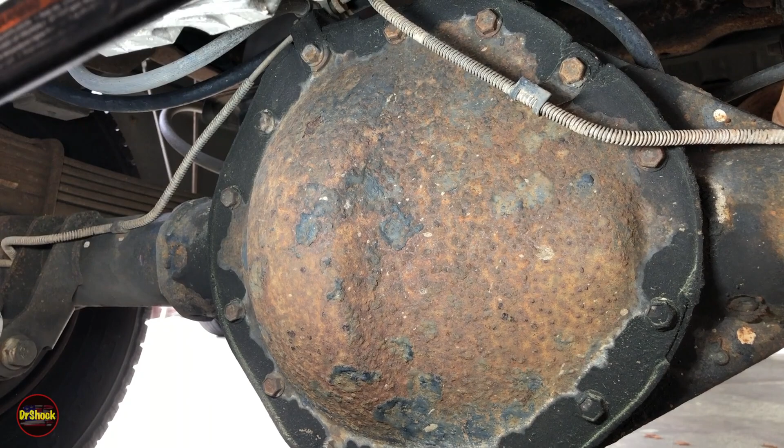Like you can see here, we've got 14 13-millimeter bolts that we're going to have to pull to get this off. One of the things we're going to look at also, since we have this kind of weepage along the top, and there's a little bit of weepage at the fill plug itself, we're going to check and make sure our vent pipe is okay, because if we got excess pressure in here, that can sometimes result in what we're seeing.

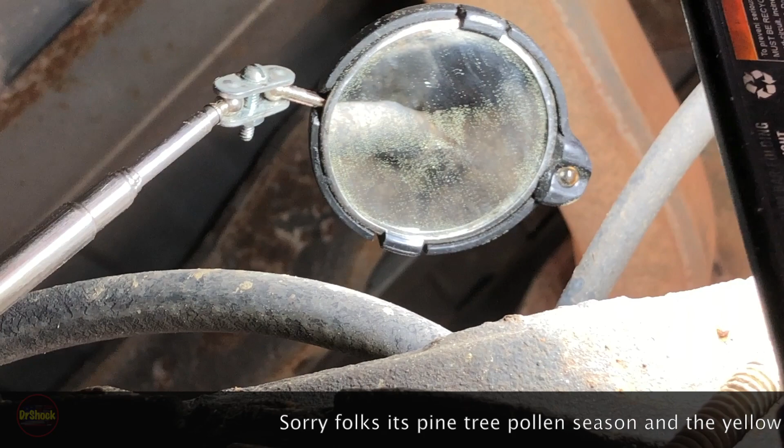So the top of the vent hose, hopefully this will allow you to see it with this little mirror, comes in and gets clamped to a connector on top of the axle. So we can see in this view here, that's it, right? And so now we know we have the hose, and now we can follow the hose.

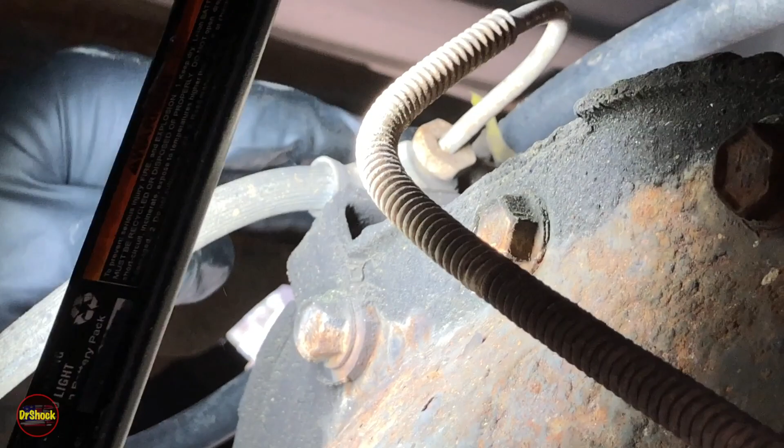It goes up here, there's a bracket along with the brake lines that holds it, and then it goes up around here. At least on this particular truck model, most of them should be similar. It goes up to this other bracket for the brake line, and then you can see at the very top of the hose there is a little one-way relief valve.

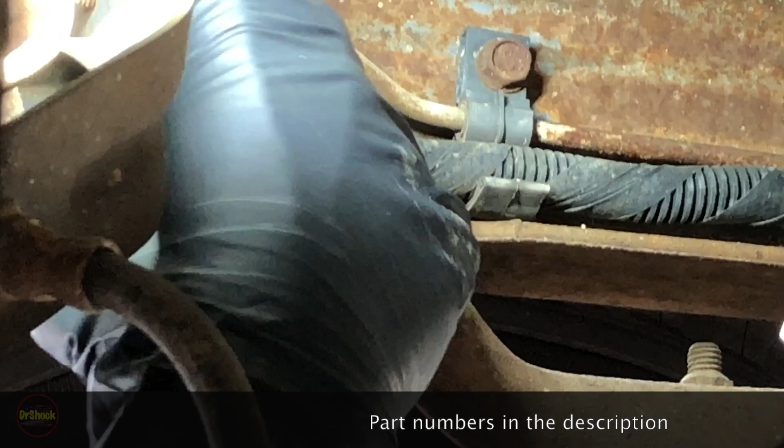So this will let air out, but not let water in when you're going off-road. You want to make sure the hose is there, it's clamped down, not broken or cracked, and not missing this little guy plugged into the top. That can also indicate a problem for what we're seeing. But since it looks okay, it's most likely the gasket, so we'll go ahead and get it off and determine if that's the case.

So I'm not necessarily going to have you sit here and watch me pull all of these 13s off. Let me go ahead and get those going, and we'll come back right before we're ready to break the seal.

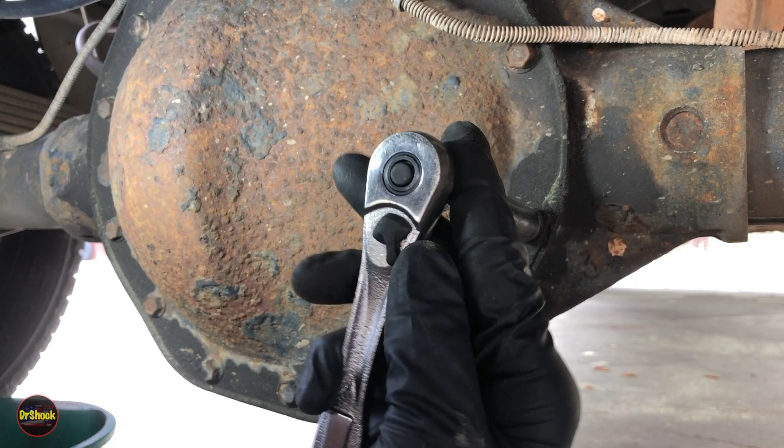All right guys, looking at the back of the axle and the differential here, here's the fill plug, and you can see there's just a little bit of moisture back here. We don't have any heavy wetness or anything coming from this, and of course we don't have anything coming and spilling over from the seal in the front here either. So this is strictly a rear gasket problem. Let's go ahead and get going on removing it.

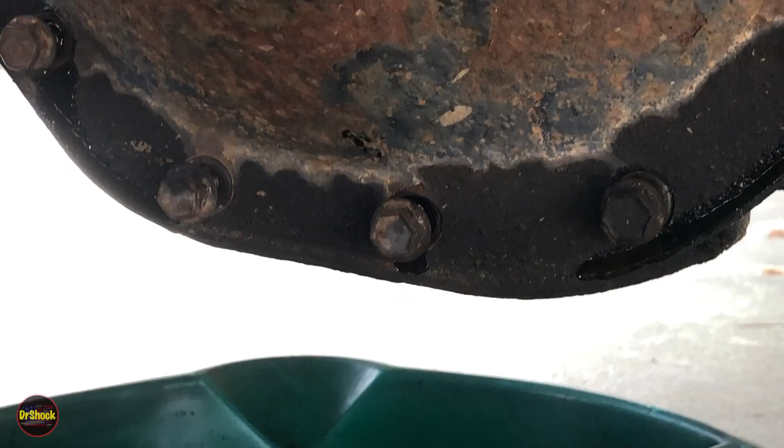All right guys, we've just got the bolts almost all the way out, just kind of showing you here. This one, just breaking the torque resulted in some leakage. The others aren't leaking at all. This one's just finally starting to weep a little bit. This one's doing a little bit only after it's nearly completely removed.

So part of this tells me right here that we've got definitely a breakage in the gasket right there, because just turning it one time and breaking the torque shouldn't result in all this leakage that's coming out. It should be more like this or this. So we're going to go ahead and start pulling these off, except for a couple. We'll come back when we get ready to remove the cover.

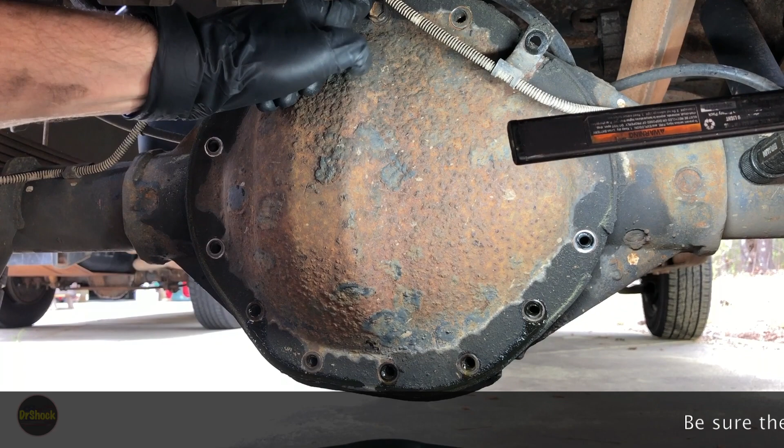All right, guys, we've pulled all the bolts except for one at the top. You can leave one or two at the top just to keep the cover on until you get everything drained. We've organized the bolts in the order they came off, and we've marked this as our index bolt. It's just a good idea to put them back in the way they came out, just in case there's any variances with the amount of time this has been sealed up.

This particular truck's rear end has not been changed since the first 5,000-mile break-in fluid was required back when it was new. So it's going to be pretty putrid when you start to get this off. So if you've got a weak stomach, just keep that in mind. What we're going to try to do now is see if we can find a weak spot where we can begin to break the seal.

We want to be very careful because we do not want to get any kind of bending on this, because that'll end up having us change the cover anyway. She can be pretty welded on after this many years. Never ceases to amaze me that you can end up with leaks when stuff is so tightly bound after many decades together.

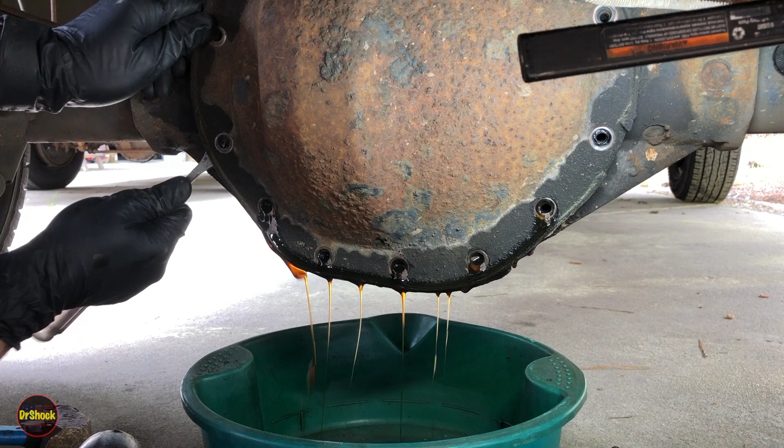Yes, it's pretty foul smelling, that's for sure. All right, there we go. And you can just slowly prise it up. Adjust your pan if you need to. At this point, she's free. And the only thing holding her on is the one bolt that we left at the top.

All right, so we will let it drain out here for a little bit until the steady streams stop, and then we'll take the last bolt off and remove it, and we'll see what we see on the inside of the cover as well as the inside of the differential. All right, we've taken that top bolt off so that we can pull this down. Watch the bracket for the brake lines and all that, just so you don't scrape any crud into the inside. We're just going to work this guy off.

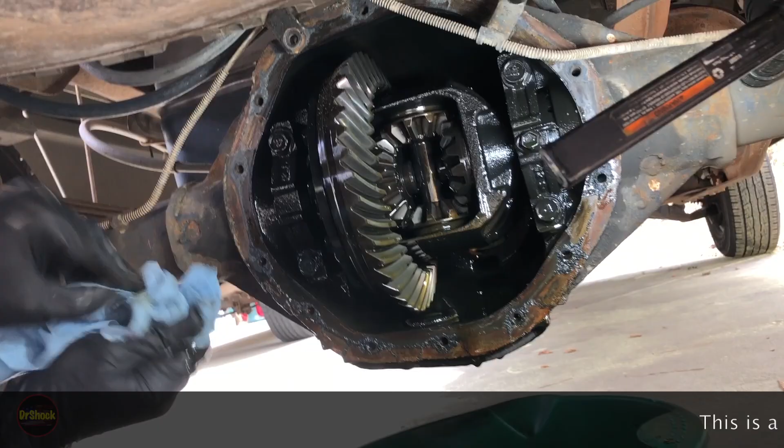So as we look at this, we tried to preserve our gasket around these holes, just so we might be able to see if anything clues us in, but don't really see any evidence of any cracking. But we can see, for example, the fluid had reached the bolt hole here. Here, this is all kind of like normal penetration. But since the gasket fragmented, we can't really tell if it had oozed up past it. But neither here nor there.

We'll clean this off of the inside surface here. We've got a little bit of this crud that got on top of our ring gear here. We want to clean that off as well. And then we'll also clean out the bottom here. I think there's a magnet in here; we'll check that as well. And then we'll do the same on the pan. Clean the gasket material off, and we'll get a straight edge and make sure our pan is not warped or has any damage that might be contributing to this problem. And then we'll put it back together, and I'll go over some of the fluid options.

All right, guys, I wanted to show you a different type of axle content here. Let me get my flashlight in position. So this is the exact same 14 bolt 9.5-inch rear on a Suburban. This particular Suburban has a RPO G80 locking differential. So you can see the differential inside the axle is different than the open type that we're working on with most of the clips in this video. So I just wanted to make sure that you saw the two different types.

You can also see we have this rear sway bar that obstructs our working area that's going to be present on the Suburban models. And also we're going to have the gas tank in a much more awkward position for the work that we're doing, but there's still plenty of room to get on here and do what you need to do.

So if I can get the camera up under here, show you, you have basically the exact same setup, right? The exact same brake line and vent line clip there, the exact same brake line clip over here. It's identical except for the contents that are inside. They also get exactly the same type of fluid.

These locking rear ends do not get limited slip friction modifiers added. Those are for cars. So if you have a G80 truck, it just gets the same thing as the open. So you can see one of two types when you're doing this particular job.

All right, guys, just an update here to show you. So we've got most of the gasket material removed off. I left a little bit here just to show you the technique. What I like to do is I just come in here with a traditional gasket scraper, since we're working with steel. Normally these have a little beveled edge. If we zoom in there, right, there's a little beveled edge to these,

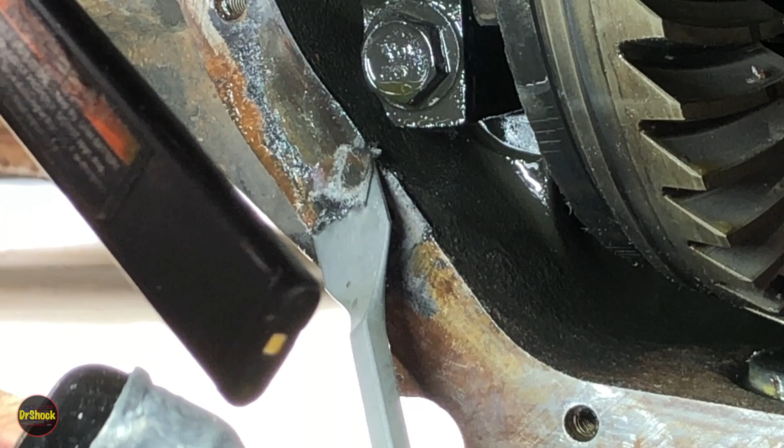right? So we'll position that underneath and then just take some kind of small hammer, just lots of small quick taps. Make a couple of passes. And then when you get most of the material off, then you can switch to a carbide scraper. You can get the rest of the gasket material that tends to want to hang around the bolt holes off.

Just want to be careful that you're not gouging and getting caught and creating any deep grooves or anything. Lots of fine scratches is actually what you're looking for. Just like that. So we'll have to work on these two to get this dried up material. If we zoom in here, we can see that's kind of hardened around these two bolts, and we want it to look like this one here.

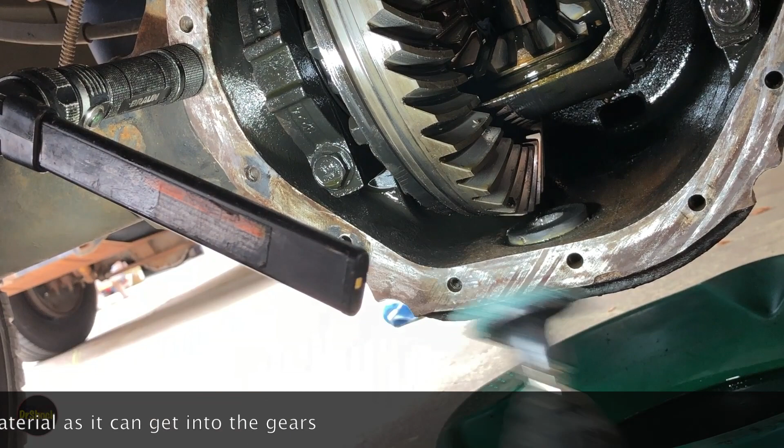And then after we get done with that, we'll run a pipe cleaner through the threads. We'll blow them out with compressed air. And then what we'll do is we'll come over with a composite type of sander. Something like this. And we'll be working that all the way around the perimeter. And then when we get done with that, we'll run some solvent like brake clean just around the perimeter where the gasket's going to be, so that we have a nice dry surface.

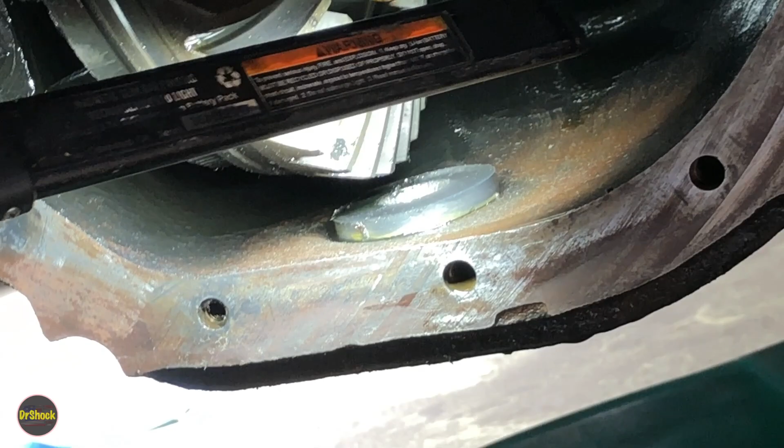The other thing that we've done is we've gone in here, we've cleaned off the magnet. We don't really have anything of concern there, just kind of fine dust type material. And we've cleaned off with a rag with solvent all along this area here. We'll do that again just before we put the gasket on. The only reason we're doing that is just so that none of the gear oil leaks out onto the mating surface until we're all done and torqued down.

Some people like to spray solvent up around the gears themselves, but I don't. I don't think that's a good idea. Just kind of leave it the way it is. Watch the teeth to see if you got any crud that has accumulated when you're cleaning up on the top. A good idea is to take a clean paper towel, put it up on top of the ring gear, work it up on top, both sides,

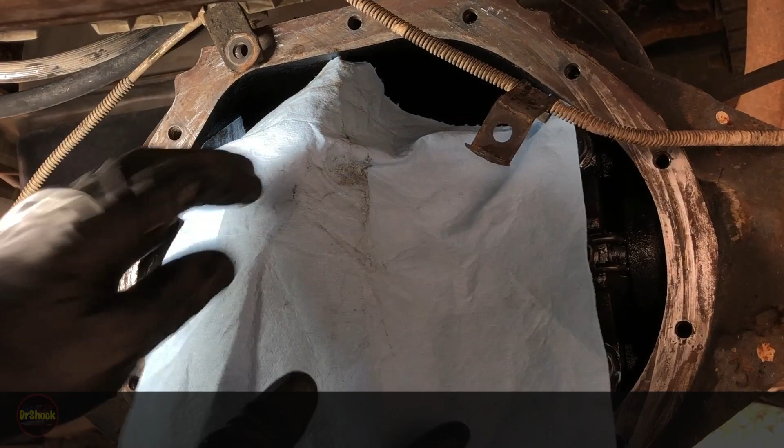kind of wedge it in there, and then as you're scraping up here, it'll just tend to hit the rag and fall down. Anything gets caught up in the top part here, you can easily just come by like this and get it all out. Let's take a look at how the cover is coming along.

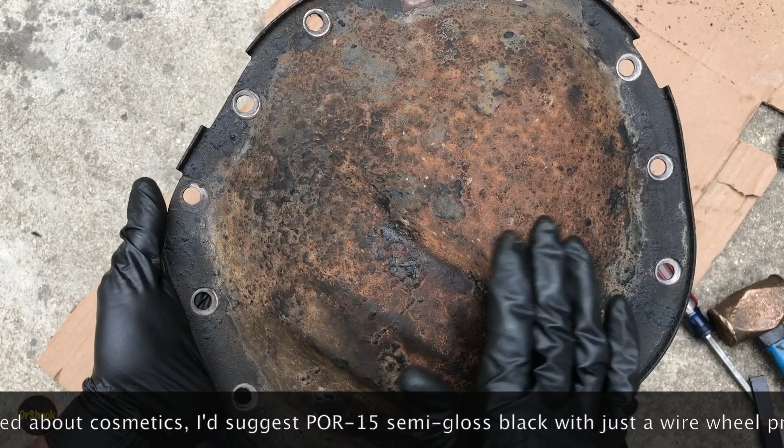All right, guys, so we've taken a small wire brush, and we've gotten the dried up dirt and dried up grease off the outside. You can still see some of the paint is evident here. We're not trying to do a cosmetic restoration. You know, if you want, you can sand all this down and repaint it, but we're just after a functional repair. Inside, we can see the fluid level over the years.

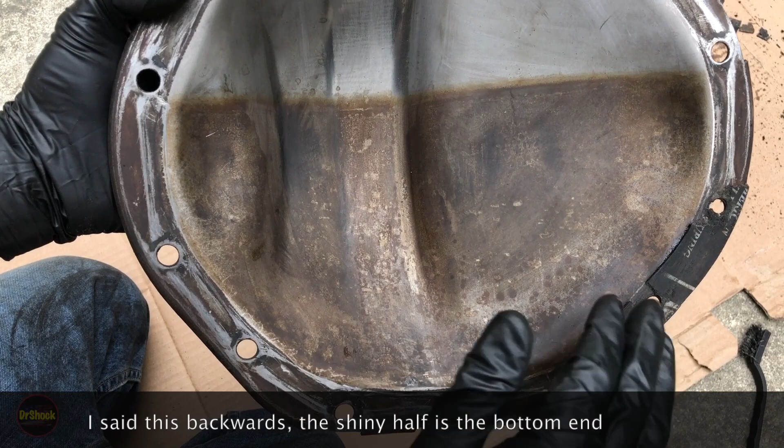So obviously, this is the bottom, this is the top. This is the degree to which you need to clean it. You don't need to worry about getting all that off. I left a little bit of the original American Axle Manufacturing gasket on here. We'll see that the replacement is this same GM division type when we get to that point. Very similar to the rear end itself.

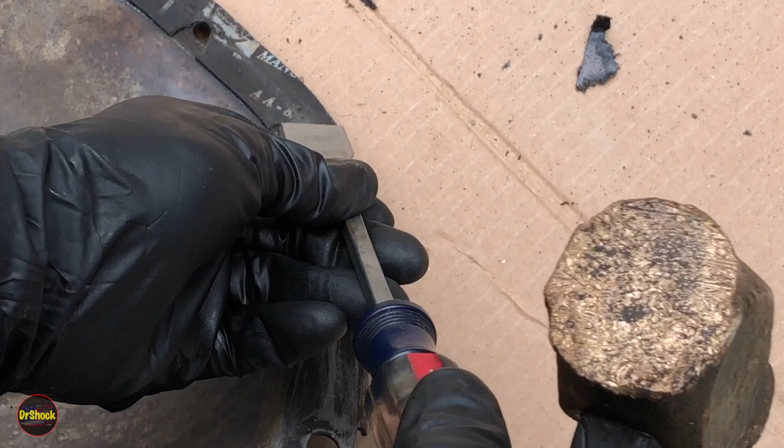We'll use a gasket scraper and a small tool like this hammer. We'll take this beveled end, get it underneath the old gasket material.

Just kind of get the majority of it off like that. And then again, with a carbide scraper, you can come in and work on the small stuff. What we're wanting to do, get some of this outer rust off. This is really just cosmetic, but you're mostly after what accumulates around the bolt holes.

So we just very carefully use the carbide scraper to work the old gasket material off, because we don't want to cause any gouges in the metal, which could mean little tiny passages that the gear oil will want to navigate through and try to find its way out to escape staying in the rear end.

As we do this, you can begin to see the metal around the bolt hole appear. That tells you that you're working your way through this gasket material and starting to get to the bare steel, which is a good indication you want to go slower and softer. But you can kind of see, right? You see the metal, you see the rust, and then the gray area is the original gasket material.

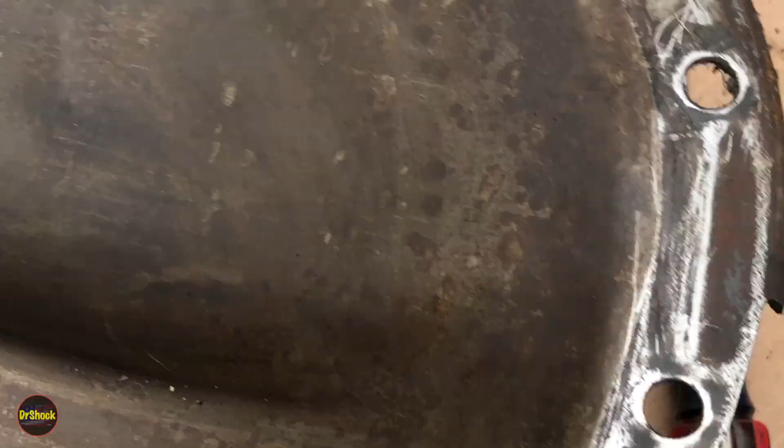So we're just going to continue to do that on these last three, just like we've done these others. We'll use a small pipe brush to clean out the inside, and then very similar to what I briefly showed on the rear end itself, we'll take a composite sanding disc and we'll go around lightly, very lightly. We're not trying to take a lot of material off.

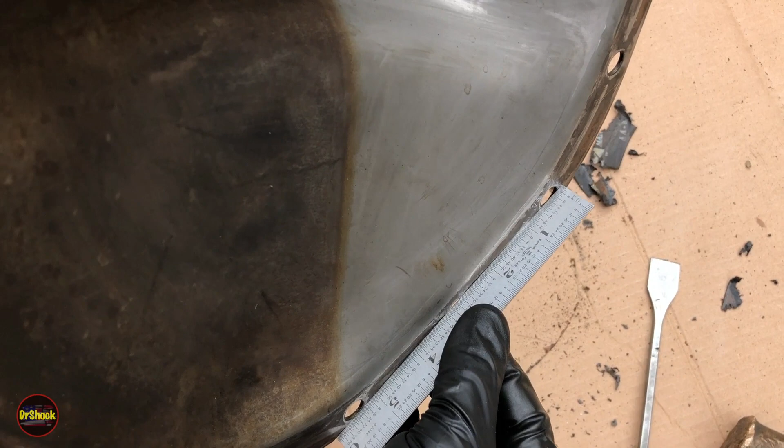It's going to be normal to see these low spots like this that have corrosion compared to the high spots. What we want to make sure of, though, is that we don't have drastically low spots. And let me show you a check between bolt holes that we can do for that. All right, so what we're looking for, sometimes when you try to remove these covers, you can bend them. And what we want to do is take a straight edge along several of the corners, and use that to check that between any three bolt holes, we don't have large gaps, right?

So we can see on the outer side here, we have no gaps. We do have a low spot if you look under that number 4, but we don't have it on the outside, so that's good. Same thing on these three, right? We don't have any low spots at all. These three, we don't have any low spots at all. You know, just kind of keep going around like that and checking it.

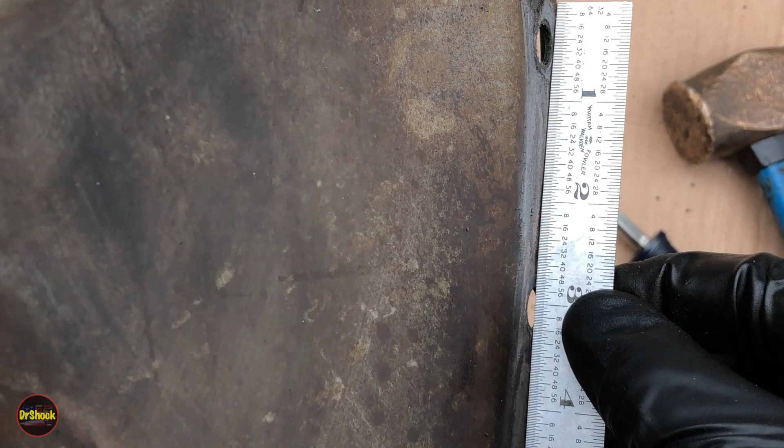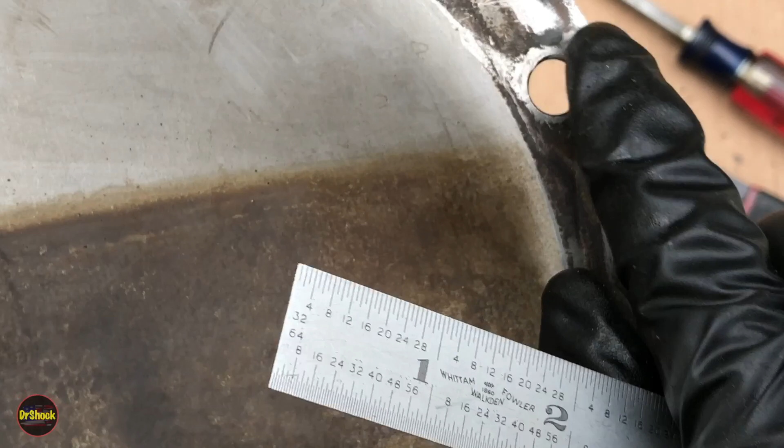If we take a look, for example, on those that we haven't finished yet, those holes that still have some gasket material, we can even see there that it's just a very, very small gap, right? So technically, you don't even have to really get every bit of this off, but you definitely want to get it to where you don't see any large gaps. I like to take it down to where I can see bare steel around each bolt hole, but I don't worry too much about these low spots that might appear. That's kind of just normal in the metal.

As long as I can see that the outer perimeter I can get bare steel, then I know it's not going to leak, right? So I'll sand and work on that until I see it. But if I don't, I would replace the cover. Like we said earlier in the video, if I've got perforation where I'm leaking through the cover, and you'll see that after you get it clean like this, then you can replace the cover if you have that problem as well.

And similarly, if you find a situation where this test fails and you're not able to correct it by putting it, for example, in a vise and trying to reflatten it, then that's another reason why you might want to replace the cover itself. So I'm going to continue cleaning this up so that we can get it put back together, show you the gasket, the part number, and the correct gear fluid.

All right, guys, we're ready to put this back on and get it refilled. So again, here's a view of the outside. We've got it cleaned up. Again, not trying to do a restoration, just a functional repair. So we're just going to leave the natural patina of our cosmetic corrosion there. Here you can see, here's the lower where it stayed clean. Here's the upper where it got stained on the metal. You could clean this if you want, but there's no need.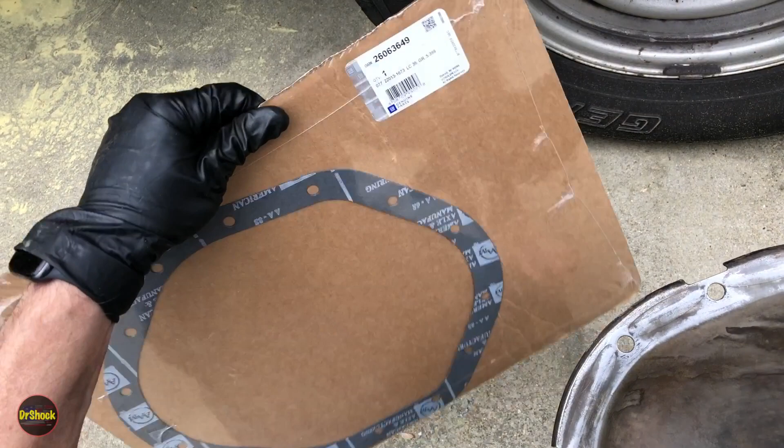Here we've gotten this finished all the way around the edge. Again, I'm not after a perfect pristine finish. I'm after a complete smooth finish that's going to be leak-free. This particular type of axle, this 14-bolt 9.5 rear end from American Axle and Manufacturing, which is a former division of GM, is going to get a gasket, not RTV, and that part number is 26063649. This is before the days of using RTV for rear ends.

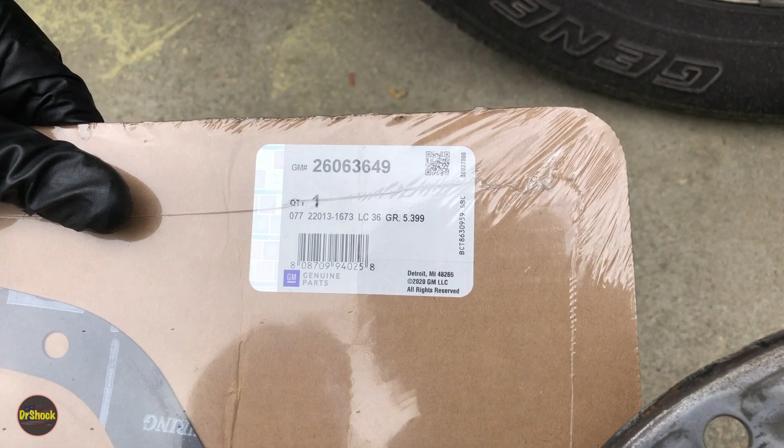They used an actual gasket of a composite material, and you can see it still says American Axle and Manufacturing, just like our old one that came off from 24 years ago. Let's go ahead and take a look underneath at how we've got that end prepared, and then let's put it back together.

All right, folks, this is how the rear axle looks when we're all done. And again, we're just after a functional, no-leak finish. So we're going to see a little bit of corrosion and low spots here and there, and that's okay. The gasket will take care of that.

Now, also while you're in here, it's a good chance, like I said before, to check the magnet down here for any small particles and clean that off of metal, but we're also looking for any large pieces of metal, which would indicate we have something else we need to chase up here. We didn't have that, but it's a good idea to check out the gears, to see if you see any damage visually.

If you don't have any noise and you don't have any strange vibrations, this is just a routine gasket change and gear oil change, but it's a good idea to watch it and check it out while you're in here. All right, so let's get this guy back together. We've positioned our gasket on top of the cover, and then we're going to get a couple of bolts to hold him in position.

I guess I'm going to have to reposition the camera here so I can get directly in front of the rear end for a moment. All right, let's get this guy in position. We're just going to keep everything very lightly lined up until we can get a couple of these bolts started by hand. Just going to get a couple on this side.

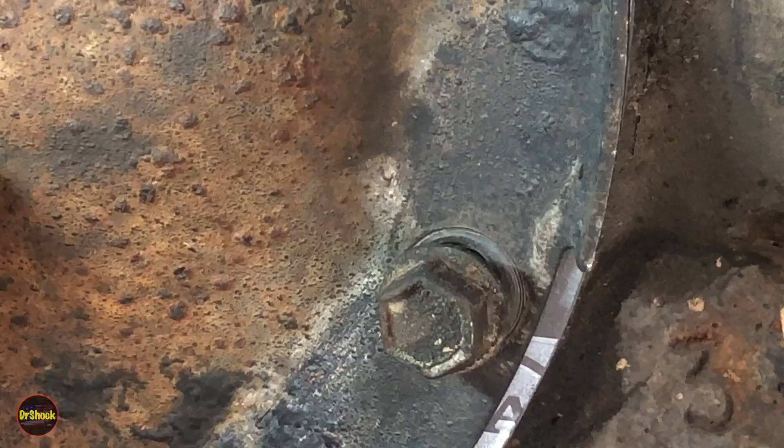All right, guys, as you put these back in, a couple of things you want to take note of. You want to use the witness marks, which are the wear marks on the cover from where the bolts were previously, to make sure you've got this shifted in position. You also want to make sure that you're seeing the gasket through some of these cutouts right here so we can see it protruding, right?

So as we finger tighten these as we go around, that'll help make sure that we've got this sitting exactly where it was before. And then we'll just continue to go around and snug it up. There's not a particular pattern, but I do like to alternate left to right, left to right, just snugging it down, making sure that we've got all of these witness marks right back where they were originally. We'll come back in a moment and torque things down.

All right, guys, it's 20 foot-pounds on these fasteners. Just using a 3/8 torque wrench to do that. Basically what I do is I just alternate every other one, and then go to the other side. I've done all these once, but I'm going to make a second pass here, and then we'll flip around to the other side, and we'll fill her up.

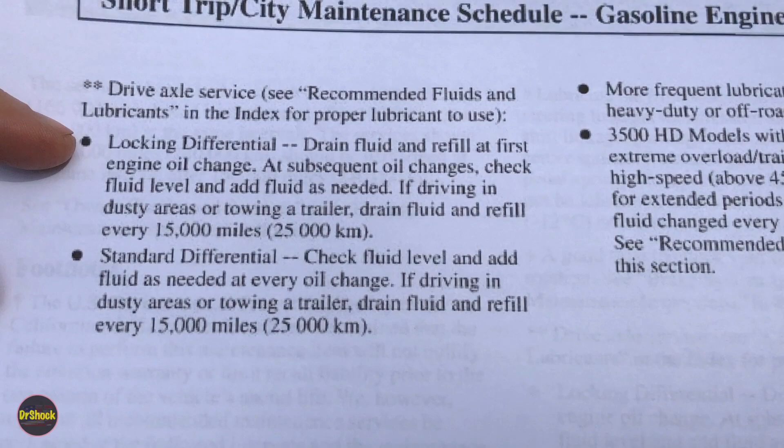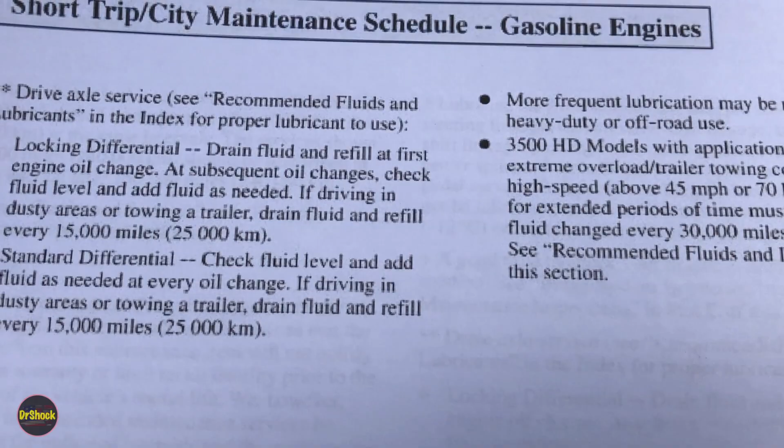All right, let's take a look at some of the maintenance advice you see in the owner's manual for these rear ends. So a locking differential: drain and refill at the first engine oil change. This is when the vehicle's brand new. And then after that, just top it off. Standard differential: just check and top it off, right? This is for short trip city maintenance schedules. And again, this is the original owner's manual guidance. So not something that you need to regularly visit on these 14-bolt 9.5 rear ends.

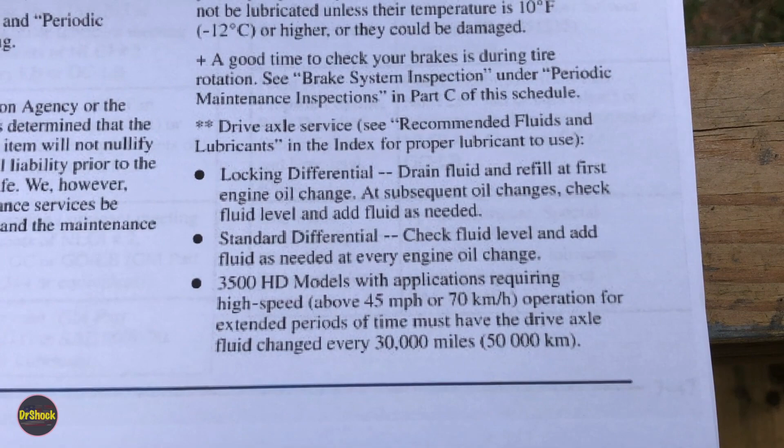If you go the long trip highway version, very similar. Locking: drain and refill at the first engine oil change, then top it off for the rest of the vehicle's life. Standard: just keep it topped off and check it every oil change for the rest of the vehicle's life. So there's really no straight up maintenance on this. The only time you ever have to do anything is when it's leaking and the gasket fails, like we just had in this video. So a couple other things I'll show you in here.

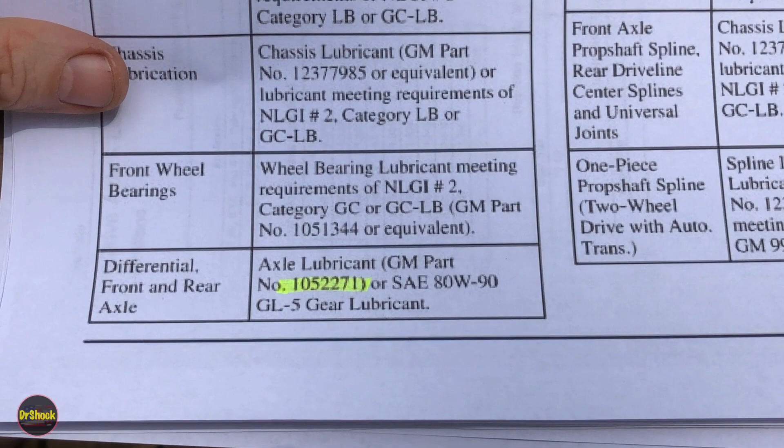When you take a look at the owner's manual, they highlight in the section on the different types of lubricants the part number you would use for the differential, same as the front and the rear. It's this 105-2271, 80W90 GL5. Just take note of that, we'll come back to it in a minute, but that's the number at the time the vehicle was new that they were recommending.

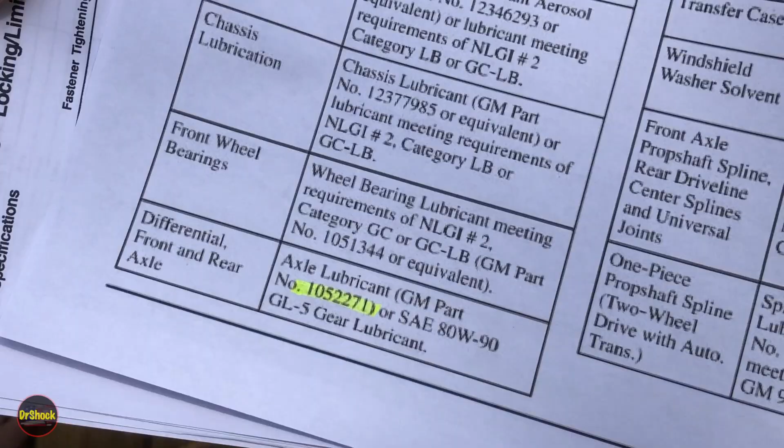If we take a look at a shot from the service manual, similarly, this is just a page out of the service manual, whether it's for the locking or the non-locking, it's the same. Again, they highlight this GL5 rated 80W90 as the type of lubricant you should be using.

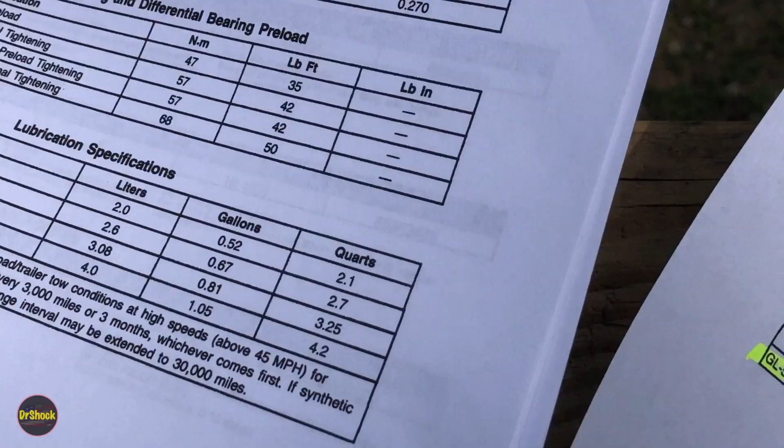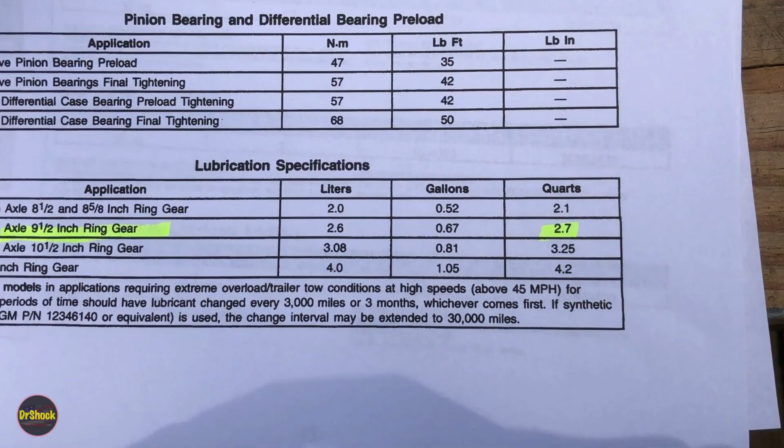If we take a look at the capacity of the lubricant, and we're doing this video on the 14 bolt 9.5, it's 2.7 quarts. So that's how much of that 80W90 is going to go in there.

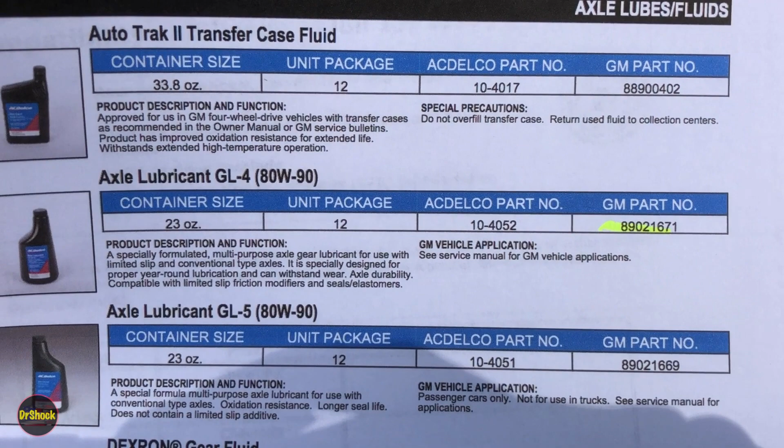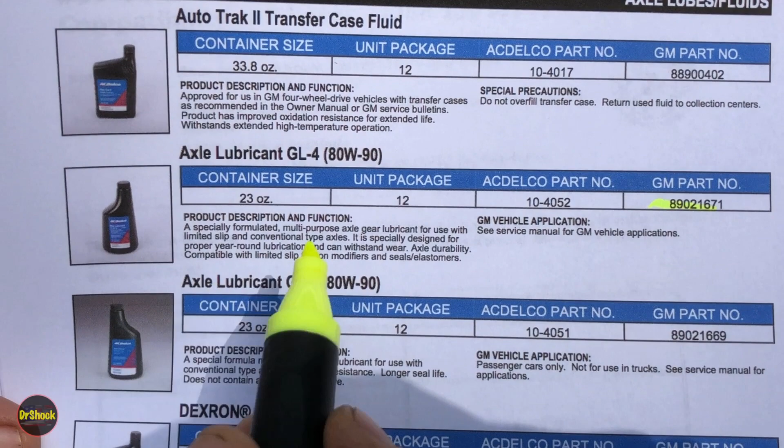Now some other things about the lubricants. When you take a look at the GM parts catalog, that old number, 105-2271, was replaced by this number, 890-21671. That first number that was in the owner's manual came out in 1994, and this one replaced it in 2004. So that's an ACDelco 104052. You can see in the old catalog, this catalog's from a few years ago from ACDelco, the same weight. The only difference is one's GL4 and one's GL5.

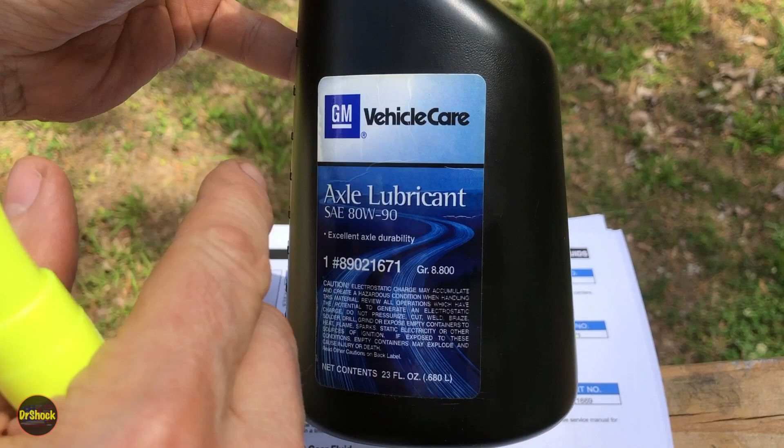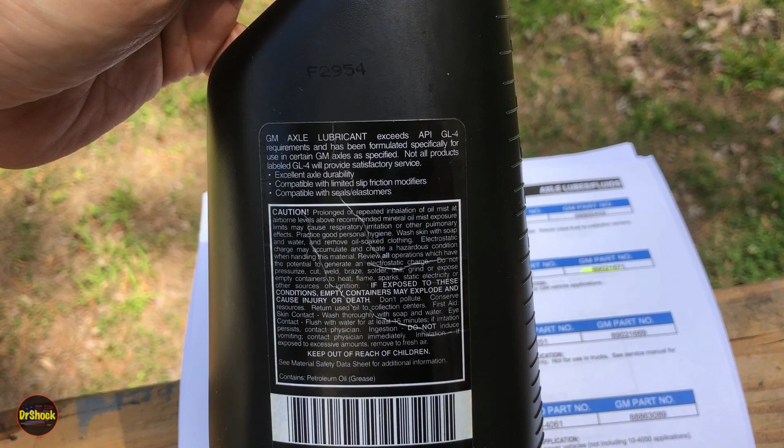This particular number is what you would normally use, and that product looks like this. So this is what that would look like. 890-21671. The later versions of this, before it got discontinued, would say ACDelco, and it'd be a bright blue and red kind of label, with an ACDelco 104052 number on it. But this is just straight up GL4 conventional axle oil, and that's what was supposed to be put in here.

If you had used it on a different vehicle that had a limited slip rather than locking, you would add an additive to it.

So this became unobtainium a few years ago. It just that GM and ACDelco, for whatever reason, discontinued it. You can't find GL4 lubricants anywhere. So what we're going to be using in this video is the other one that is still available, the GL5.

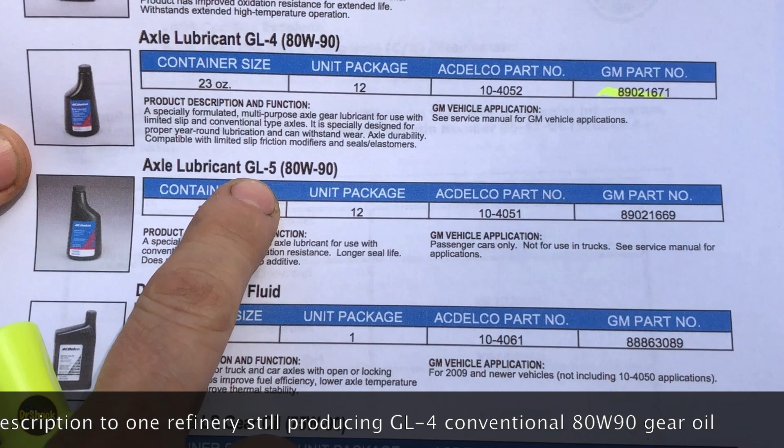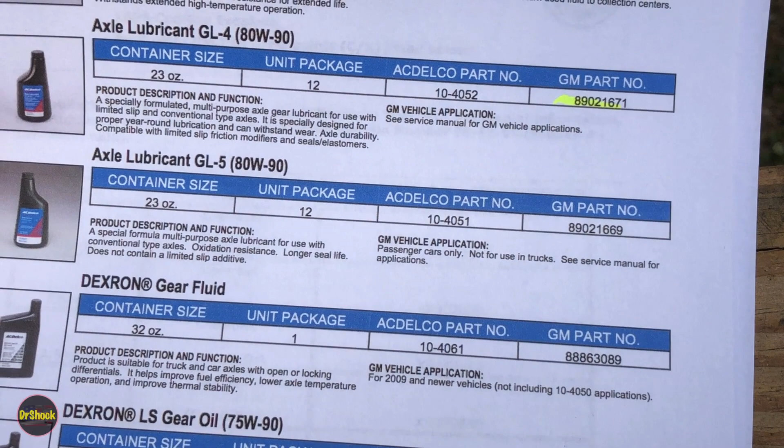The GL5 specification of this is what matches what's in the service manual. It's even what matches what's in the owner's manual, even though the part numbers don't match. I'm not really sure why GM said this but actually only had this available, because back in the day when these trucks were new, you couldn't buy a GL5 from GM or ACDelco for them. But eventually, this is all you have available now. So this is what we're going to be using, and it looks like this.

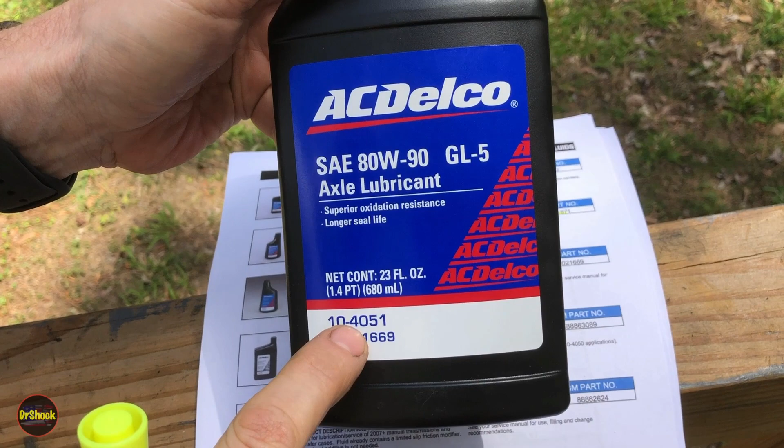And this is the later kind of packaging. And you could have gotten the other one with GL4 and the 4052 version up until a few years ago, and it just got discontinued a few years ago.

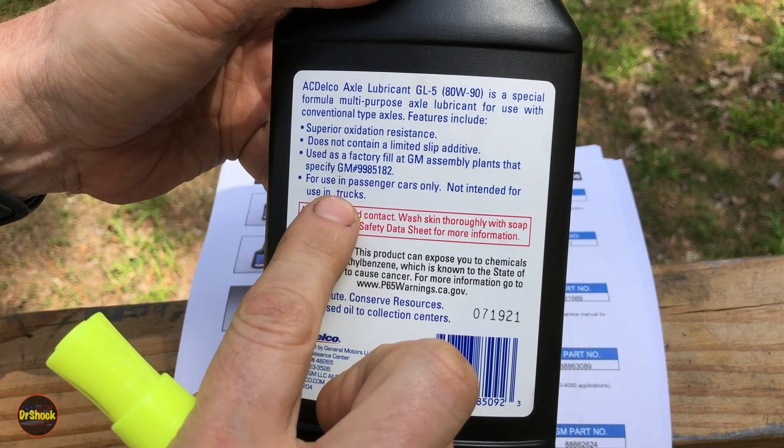Now this one paradoxically tells you that it's for use in cars only and not for use in trucks. Just remember that's because most trucks from the 1999 pickups with the GMT 800s, the new body style all the way forward, were using a 75 weight synthetic. And this 80W90 is not something that would have been in trucks for the last 20 years. So that's what that kind of labeling's for. It's not like it's going to cause some problem to your vehicle if you put it in there.

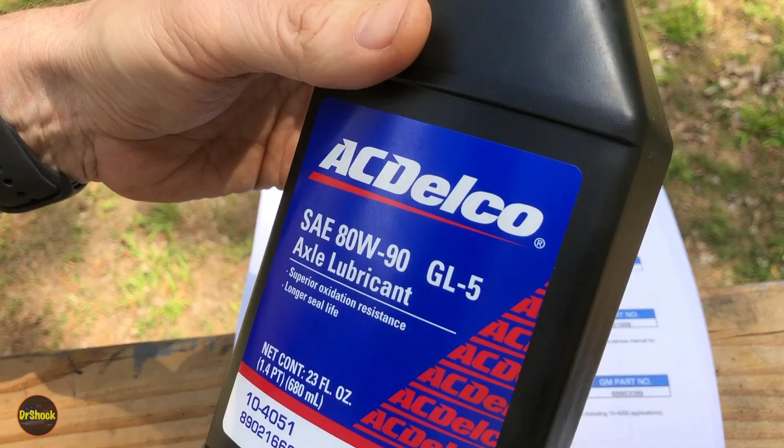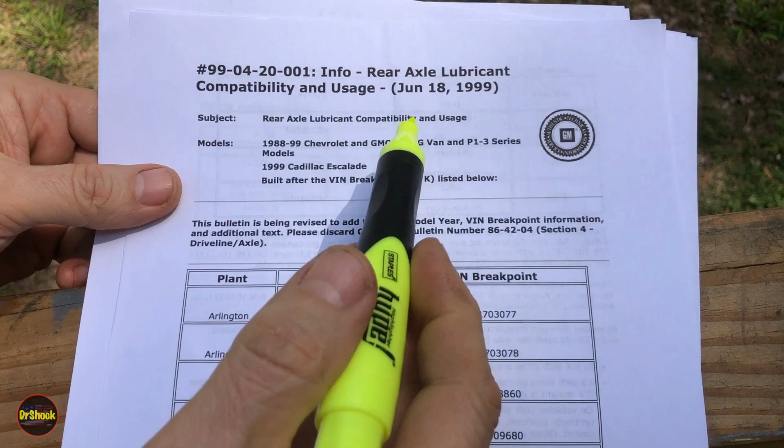Now, a few comments about going with this. I pulled this service bulletin for folks that might be concerned about not sticking with that GL4. This is from 1999, and it covered all the CK and G and P trucks from the range that we're talking about here with the old body style, including the 99 Escalade. It would have also included the 2000 carryovers on those as well.

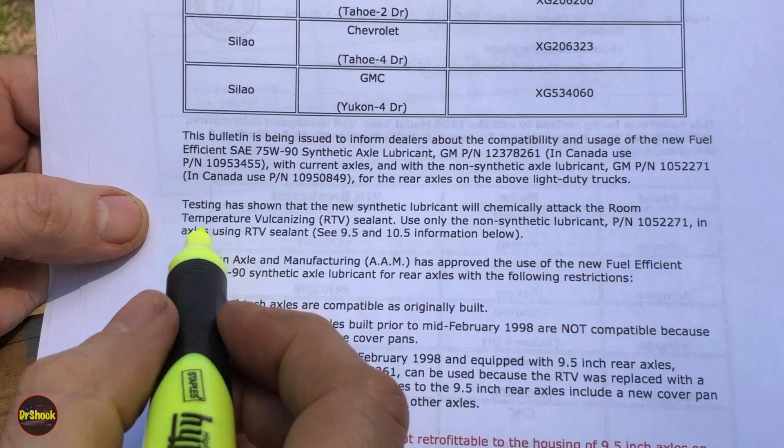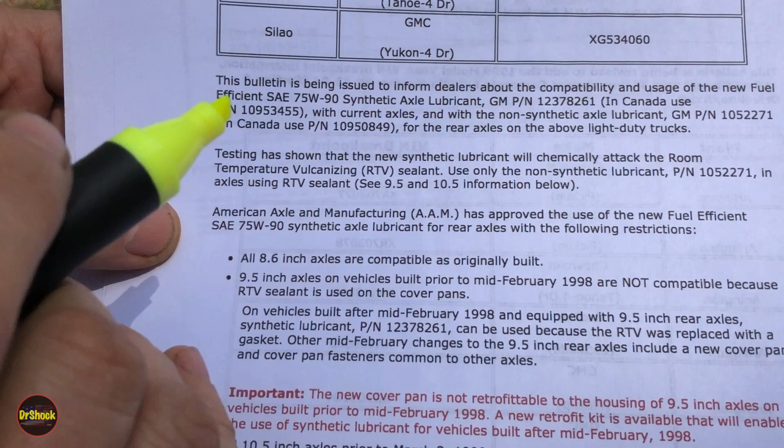And what's important here is not necessarily all these VIN cutoffs, but what they talked about was that they were recommending at the time that synthetic gear oil would attack the RTV sealant that was used in the rear ends of some of these CK trucks. So they were saying to only use the non-synthetic 105-2271 in those axles. And that's probably where the GL4, GL5 difference came from. That's just speculation on my part, tying into this and similar bulletins.

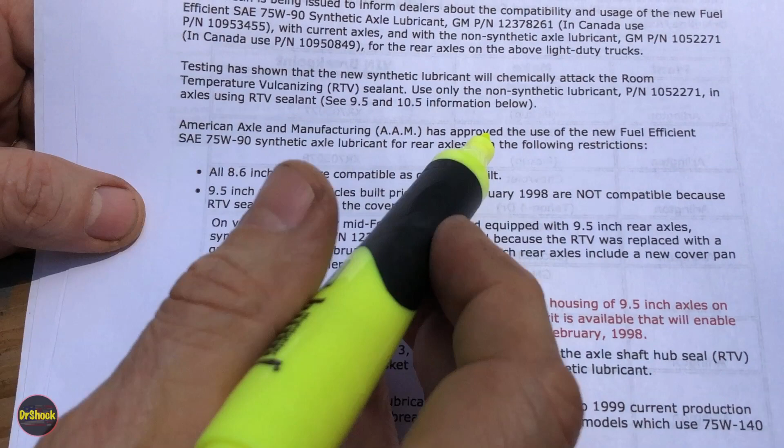And what they were telling you here, American Axle and Manufacturing, who makes the 14-bolt 9.5 rear we're using in this video, has gone ahead and said it's okay to use the 75W-90 as long as these kind of conditions are met. And if we look at the 9.5-inch axles, there's a VIN cutoff up above, but it corresponds to this point in time.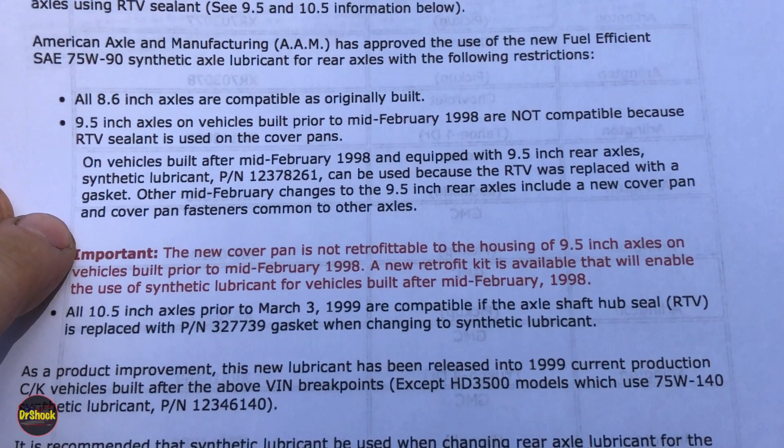And if you got the version that uses a cover with a gasket, which is what we've got, then you could use the synthetic lubricant at the time. So what all that means is we're fine using that GL5 lubricant.

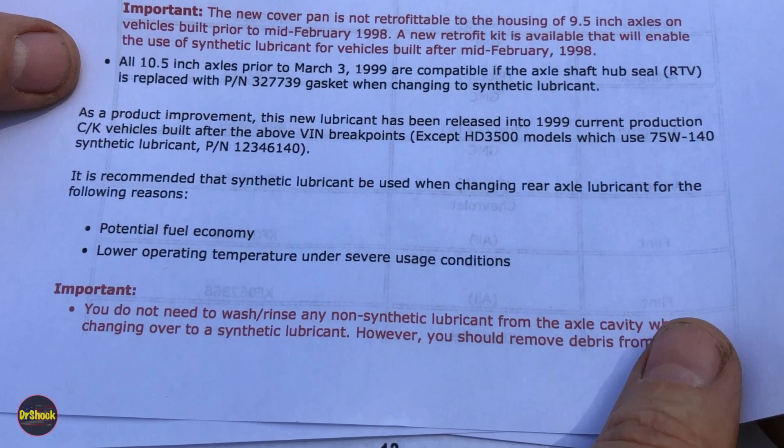A couple other notes from the service bulletin worth pointing out. You don't need to spray out the old lubricant, so they definitely don't recommend you go spraying brake clean all over the spider gears or the locking mechanism if you have a G80. Just want to get the debris off the magnet at the bottom and any kind of debris that's on the bottom of the housing. And then, of course, do not use a limited slip additive if you've got an RPO G80 truck rear end.

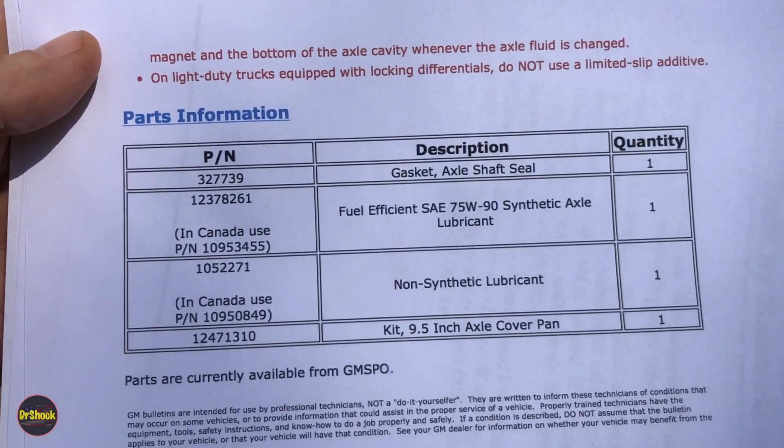All right, guys, now we're going to take the fill plug off. It's just a pipe plug with a 3/8 cutout on the end of it, so you can just use a standard 3/8. I guess our flashlight is giving us some problems. Go ahead and pull this off, then we'll switch to another flashlight since the battery on this one is almost out. So this is just a standard kind of pipe plug. There's no gasket on this particular type, and there's no sealant or any kind of Teflon tape or anything like that.

Once we've got this open, we can add the fluid. But let me get another flashlight so you guys can see what I'm doing. All right, we got our flashlight back in business.

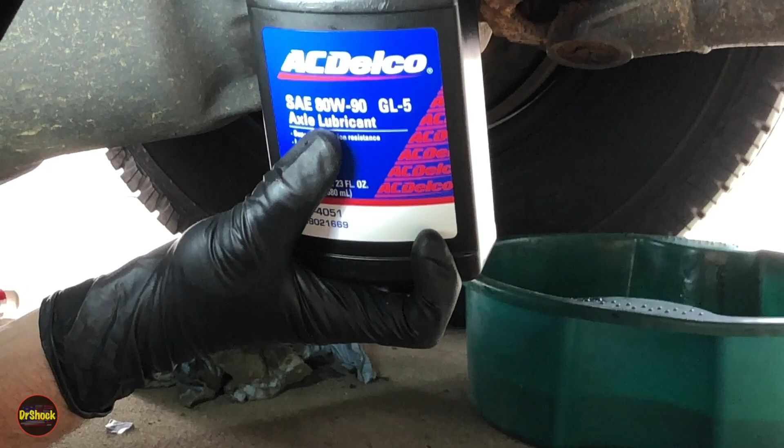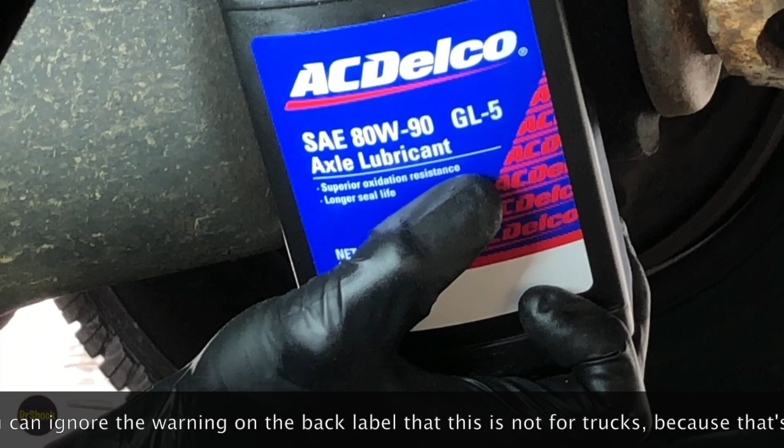So, where we picked up, we just took this filler plug off that has a standard square cutout that fits a regular 3/8 extension. And so the gear lubricant we're going to be putting in here is this ACDelco 80W90 GL5. And like we showed earlier when we went through what's in the service manual and the owner's manual, 80W90 is the correct viscosity for this particular era of axle. So this 9.5-inch 14-bolt rear, this is what it takes.

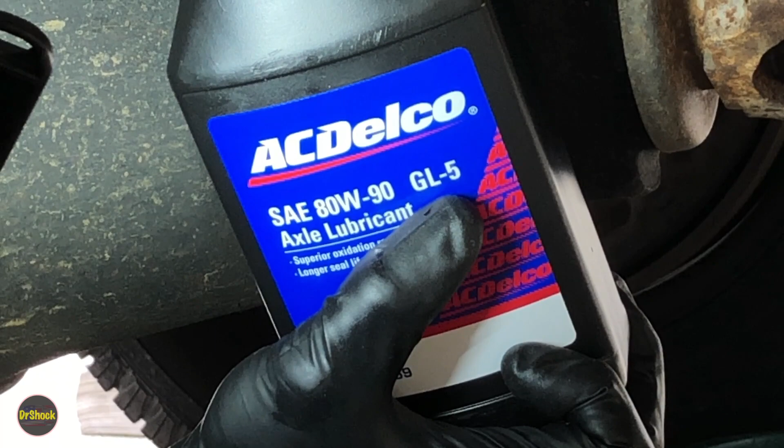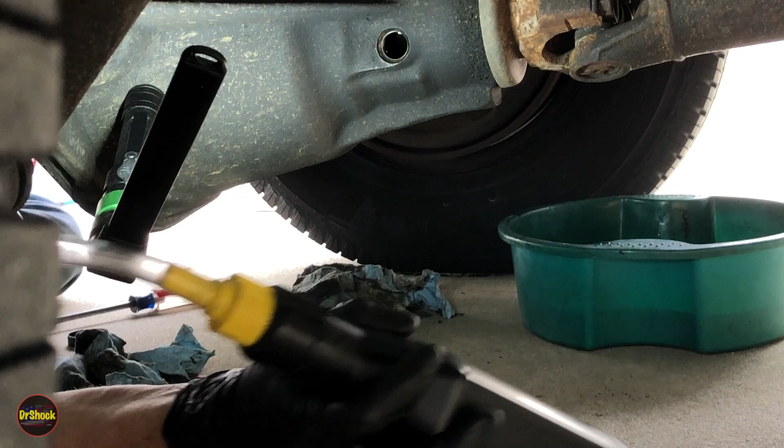Now, the capacity for this particular one is 2.7 quarts. So we've got several of these on hand so that we can do that particular capacity. And all we're going to do is put it into this fill plug until it overflows. There's really nothing more to it than that.

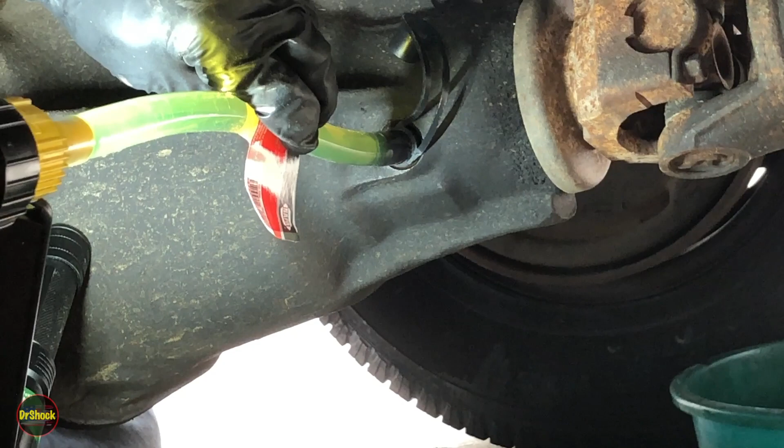I'm not going to sit here and have you guys watch all of these, but we'll load up the first couple, and then when I get to the last one, we'll come back and show how we tell when it's full. All right, guys, after you go through 2 of these and you're on your 3rd one, you want to go a lot slower because it's going to be on this one that it gets full.

And so what we're watching for is it'll start to overflow out of the fill plug. You see right there, we're starting to get it oozing out of the fill plug. See if we can get a little bit more in here. Nope, that's it.

Okay, so at that point, it's almost empty. Just kind of let the excess run back into the container. Get that guy up so you can run back in. And you can check this yourself with your finger. Let's clean this up a little bit. You can just take your finger, make sure you got nothing on it, no dirt or anything, and you can put it right back in here. You can make sure that you're sticking it in to the actual level.

And then you can put this guy back on. Just get him going by hand first. And then take your 3/8 on a torque wrench set to 18 foot-pounds and tighten them up. And that is it. Just that amount of torque there should be enough to have there be no leaks. Clean up the overflow, get some brake cleaner, spray it down, get the rest of it off, and the job is done. Take it for a test drive, check for leaks.